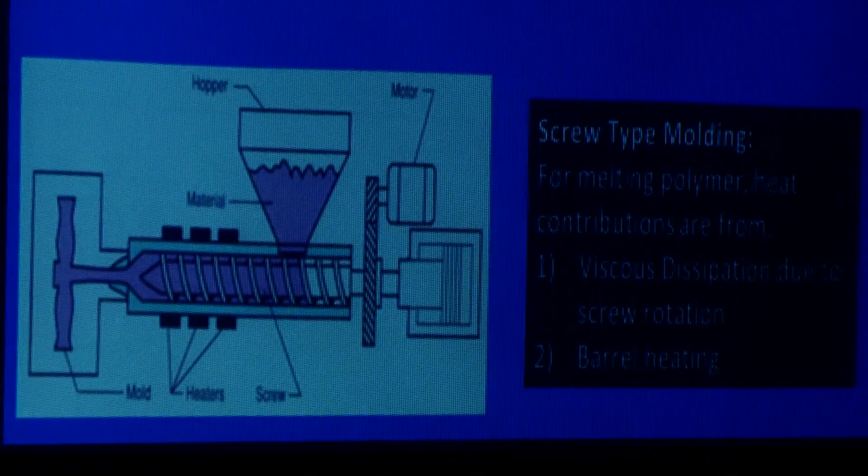Just to summarize our basics of the machines, let us understand what is the function of screws and barrels. In 1872, when the first molding machine was developed, it was a plunger type molding machine. So we used to put polymers inside the barrel, and then heater band used to melt the polymer. And then with a plunger, we were forcing the material into the die.

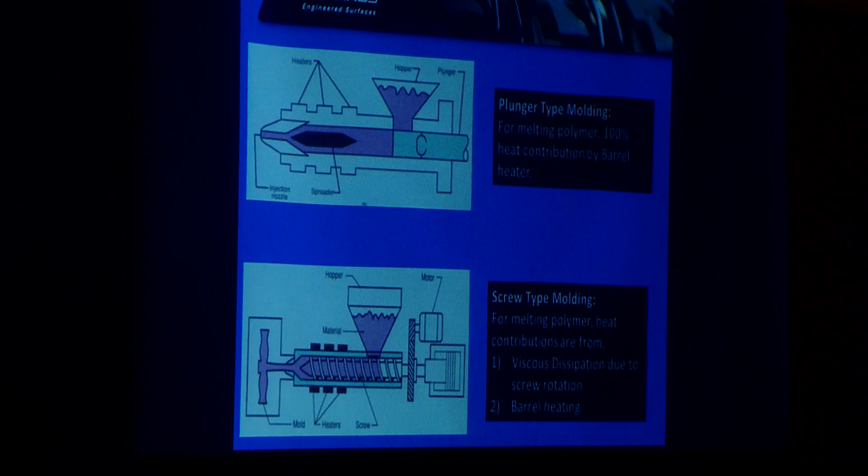With new innovations of screw and barrel type, there is a misconception that the barrel is doing all the heating and the screw is just conveying the material further, which is not the case. In molding machines, whether it's extrusion or injection, what you are using right now, the prime cause by which your material is getting melted is because of the screw rotations, which creates a phenomena called viscosity dissipation. And your barrel heating is just a secondary input.

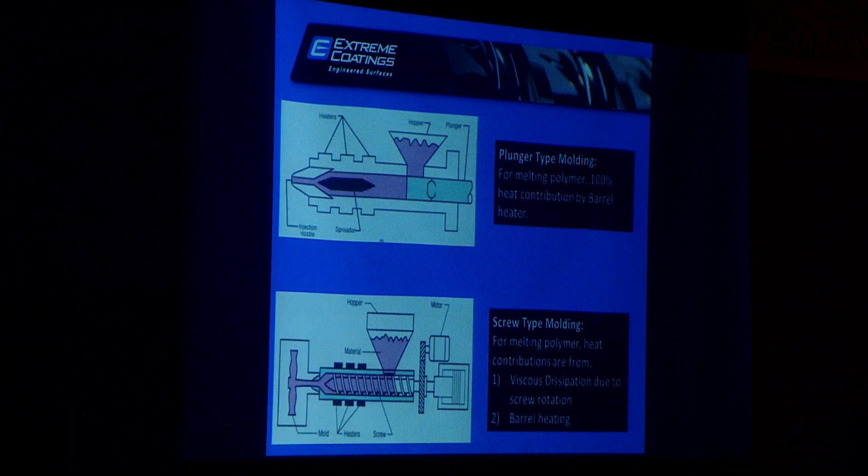What it does basically, when the screw rotates, is stretch these films, and because of this stretching and compressing, it generates heat. The bottom picture can explain you in a much better way.

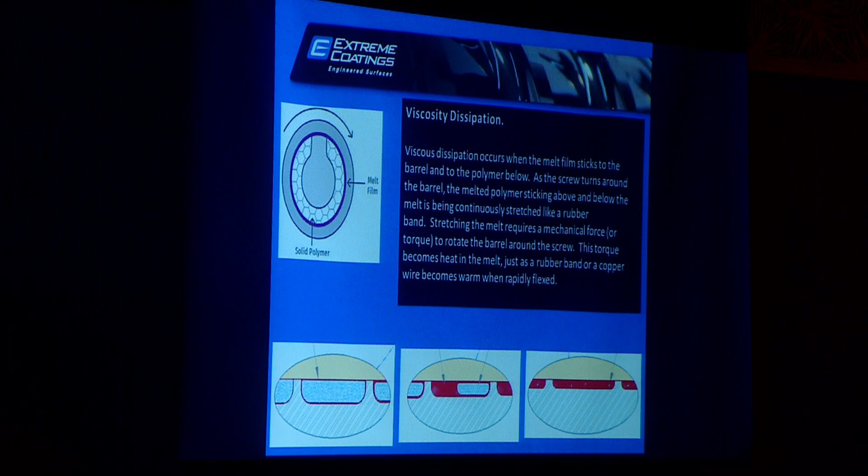So you can see that all it's doing is, from motor to gearbox to the screw, we are converting electrical energy into mechanical energy, and that mechanical energy is basically melting your polymer.

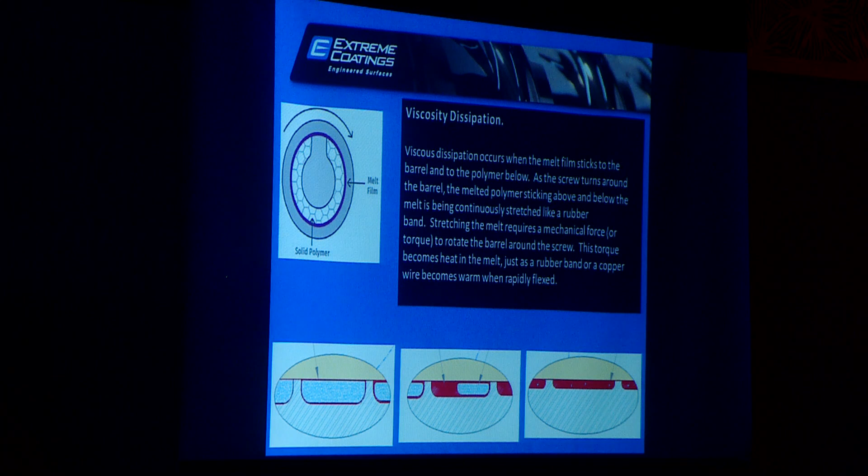Next slide can explain you more properly. This is a cross section of polymer bits in your feed zone. Then you can see how it is melting section by section.

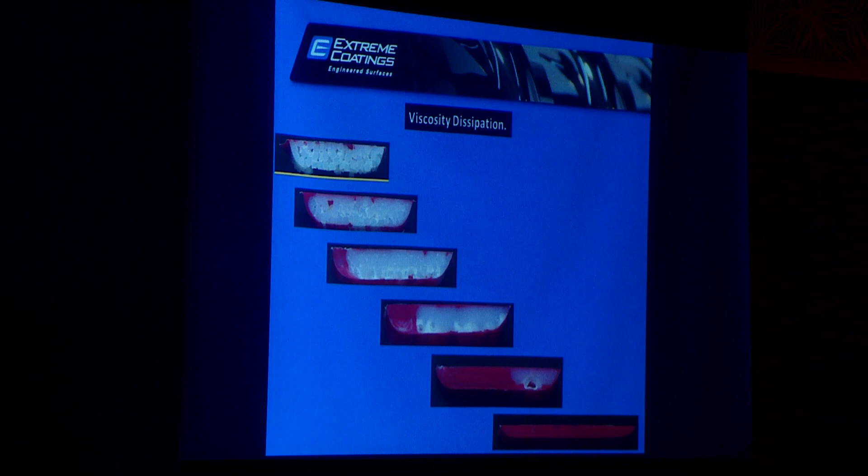So that's what is exactly happening in your screw and barrel, from feed zone to compression zone, and from compression zone to your metering zone. So your screw and barrel is nothing...

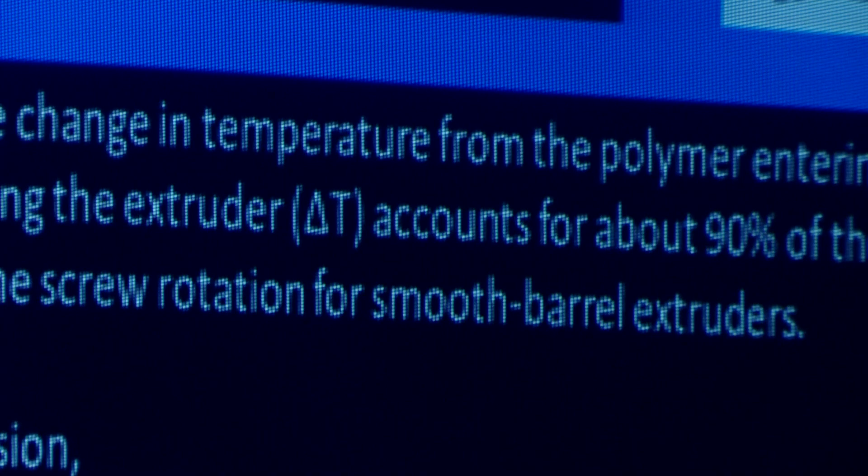Just to mention, these photos we have taken from Dow Chemicals website. Maybe this picture can explain you more properly why the screw requires torque, why the screw requires power, because when you stretch those films, it needs lots of power.

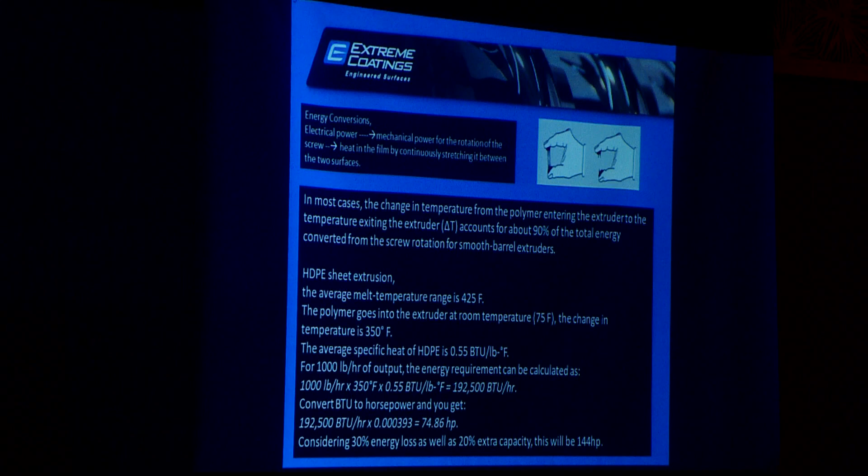So this is how energy conversion happens in your machines, from electrical power to mechanical power, and because of the mechanical power, the screw is rotating and heat is generated. So if you have machines, and if you really understand, this is what is exactly happening in your machine.

Let's take an example. You can see the bottom side. If you know the specific heat of the polymer which you are processing, and also if you know the average melt temperature of that polymer, you yourself can calculate what should be the motor capacity of your machines.

So here I have taken an example of an extrusion line. Let's say we have an HDPE sheet extrusion line, and I wanted an output of 1000 pounds per hour. Suppose that's my desire. Then what is the energy I'm going to require in the system?

So what I will do: I know the average melt temperature, I also know the ambient room temperature at which the polymer is there, and I just know the temperature difference which I have to achieve. Now you know the specific heat of that polymer, which you can Google also. Once you know that, use this formula and you will end up having the converted HP.

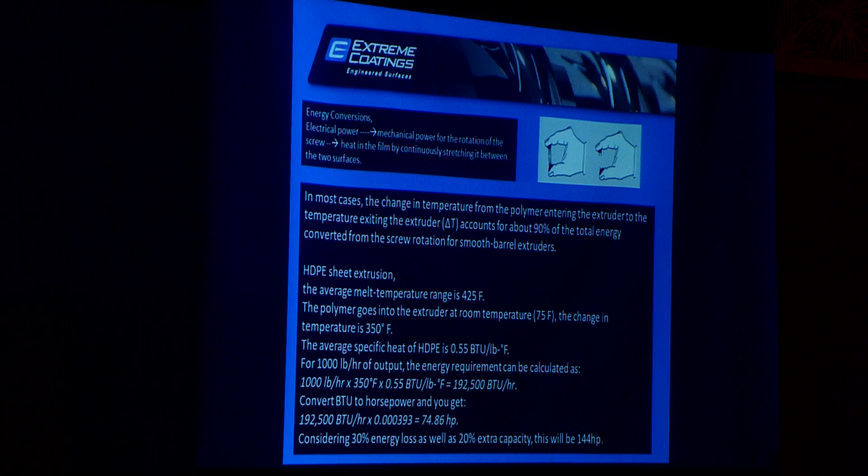In this case it is coming to around 74 HP. We are aware that in energy conversion, some energy loss can happen, so add 30% to account for the losses from conversions. What you get is the power required to melt your polymer. Now, we know that we cannot use 100% of the power capacity, so add 20% more to that, and you will arrive at a number very close to what you have in your machines right now. This is exactly what is happening in your machines.

Now, what is a critical point? Friends, when you buy a machine, there is a clearance given between the screw and barrel. How do you calculate this clearance? If you know the ID of the barrel, let's say 45 mm, just multiply it by 0.001. That is the clearance you get in your screw barrel when the screw and barrel are new.

And what is a critical point? It is the point after which the screw barrel will not function the way it should. That means a lot of unmelted polymer will pass through, or other issues can happen. In extrusion it is directly measurable because there is a loss in output. So what is the critical point?

When you buy a fresh screw and barrel, there is a clearance given, and once that clearance becomes 2.5 times the original, that's what we call the critical point. Beyond this, you are going to make a loss, or you will not have the optimal profit or quality you expected from your machines.

So as a processor, can we avoid this? No, we cannot avoid this. The best we can do is postpone this wear.

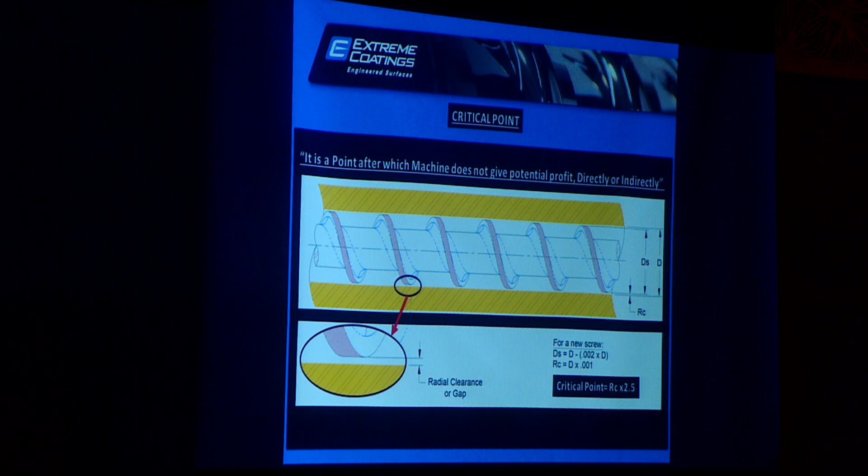I don't want to go much into this, but these are the calculations for how you can calculate the clearance and make a chart of all the machinery in your plant, showing the critical point of each machine. Every 10 or 12 months, when you do cumulative maintenance or something similar, you can check whether the clearance has gone beyond this point. If it has, please address the issue. Do not continue to run your machines, because somewhere you are sacrificing the quality of your products.

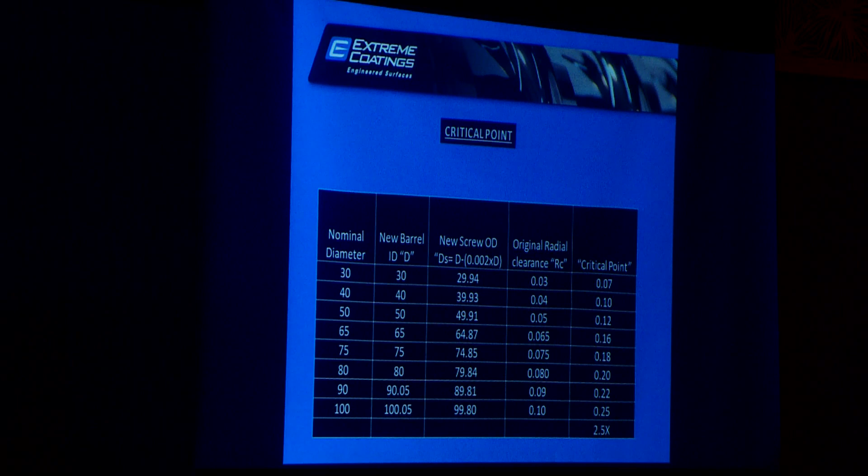What happens after the critical point? If you are an extrusion machine processor, your kg per hour output will definitely reduce, and you will get degraded articles and so on. It is surprising for us when we go to injection molding processes and ask, do you think wear has happened? And the answer is no, we don't think so, because nothing has changed in the cycle time.

But when we actually go to the shop floor and speak with the operator, we realize that the operator did change the refilling time. It's just that it is still not challenging the cooling time, and that's why the cycle time stays the same, yet the wear has happened. Now, does that mean we should continue running the machines?

You should not, because somewhere you are sacrificing the quality, knowingly or unknowingly. We don't always know how to check that quality, but if you have a very stringent process to check the quality of the part, you will find out it is not producing good parts. And it definitely affects the weight variation too.

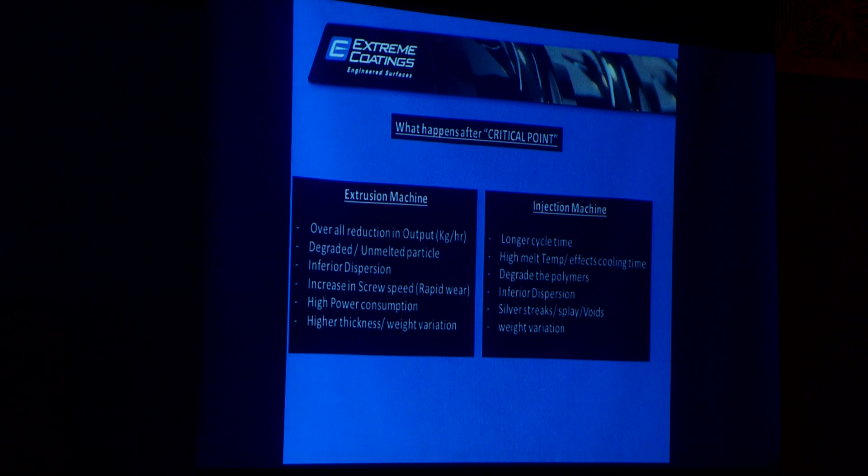Here's an example, a live case study. There was a client in Indore who had twin extrusion machinery. They were into pipe manufacturing and had 9 machines. When they purchased these new machines, the targeted throughput was 340 kg per hour. That's how they started the machines.

So we can say the machines were not used to the best of their capacity. In injection molding, you can't actually see a huge production loss because, as I said, sometimes the cooling time can compensate for production. That doesn't mean it is still giving good quality, though. Somewhere, it is affecting your quality.

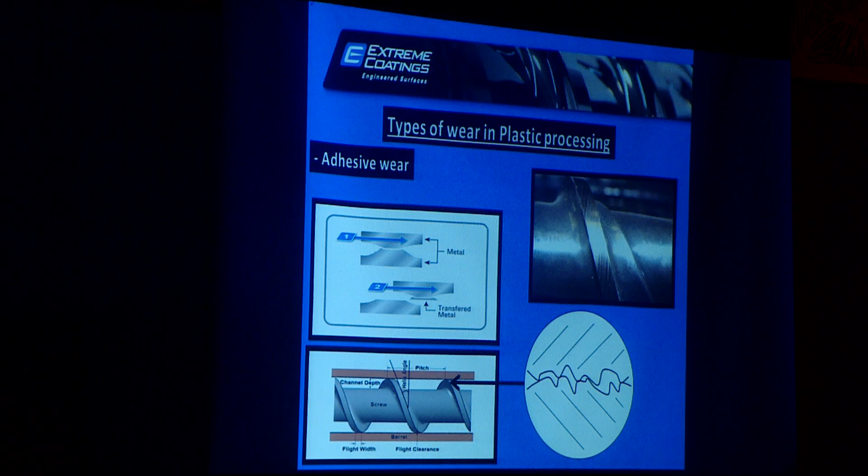So why does wear happen? As I said, there is no way you can completely stop the wear. Wear is going to happen. What are the reasons for it? This itself is a very big subject, and it's very difficult to cover these things in a few minutes. But there are typically four kinds of wear.

The primary reason wear happens is metal to metal wear. Why does metal to metal wear happen? Unfortunately, in extrusion or injection molding machines, the assembly of the screw is a cantilever assembly. So one side is always going to be free. And if you put fillers, or if the diameter of the screw is very high, because of the self weight, somehow, some way, two surfaces are going to come in touch with each other. Which two surfaces? The barrel ID and the screw OD.

Now, with our eyes we cannot see this. We see that the screw and barrel surface are very smooth, but actually it is nothing but peaks and valleys. And two high points, under tremendous shear, come in contact with each other. It creates welds between each other, and because the screw is rotating, it ruptures the steel, whichever is the weak one. That's how the wear starts in your machines.

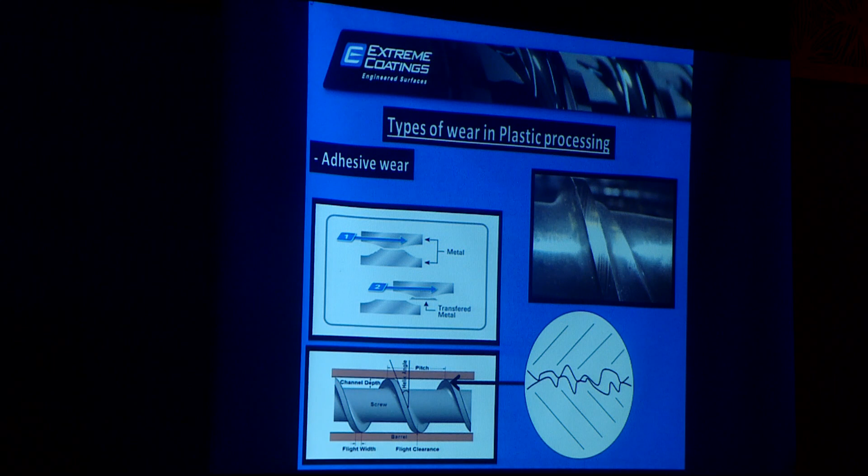So there are many reasons for this. As I said, the alignment, the deflections, and the cantilever kind of assembly, these are the reasons.

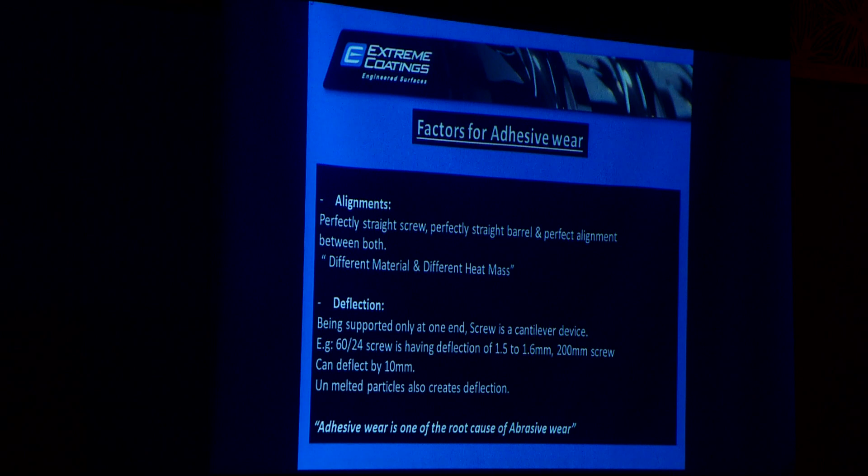Third kind of wear is corrosion wear. If you are processing PVC, CPVC kind of polymer, or let's say PTFE where fluoric acid can attack your surface. Or even in some of the engineering polymers, there is a thing going on, HFFR, halogen free flame retardant, you have to use. That itself is very corrosive in nature, which attacks your base metal and pitting starts happening. And that's how the wear happens. So this is the third kind of wear.

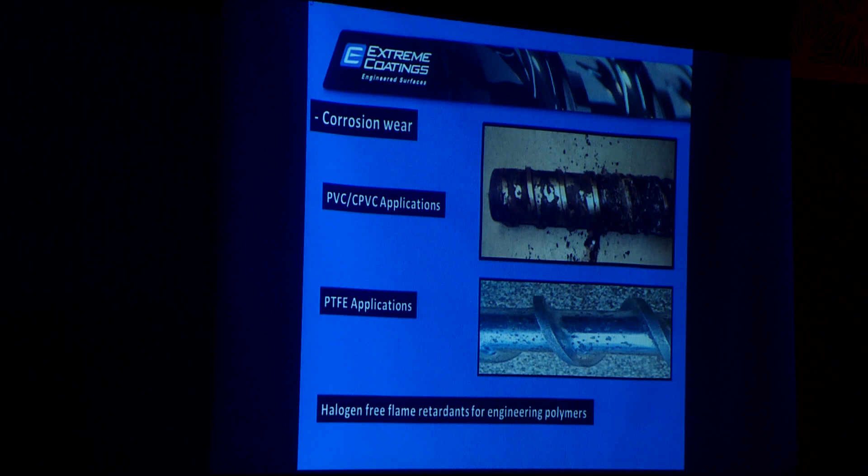Fourth wear is erosion wear. This phenomenon is mainly witnessed by people who are using groove feed extrusion lines. Near the feed pocket, groove feed helps to feed the material a lot. But at the same time, it creates lots of back pressure on the sidewall of the flights. So instead of the screw wearing out from the top, it starts wearing out from the sidewall. And eventually, the feed capacity gets reduced and you start getting lower and lower output.

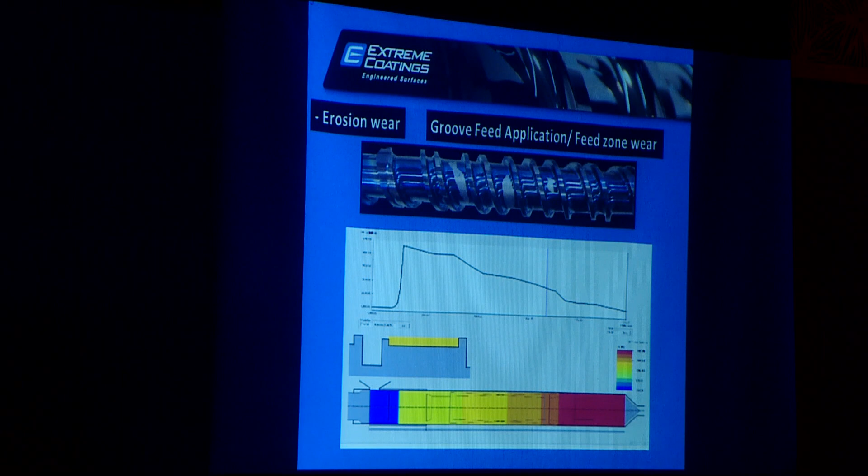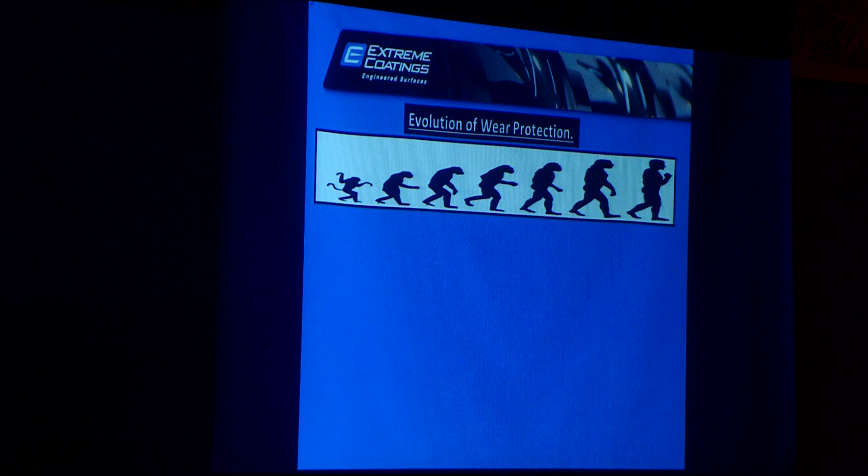So then, actually my topic starts now. What is the evolution of wear protections? Because we have realized there are lots of issues and we need to address that.

First way is, can we play with the steel of the screw and barrel? This is very typical in India. We use EN19, EN24, EN41B, Nitralloy 135. Then in some of the corrosive applications, people use 17-4 PH stainless steel, Hastelloy, nickel alloy.

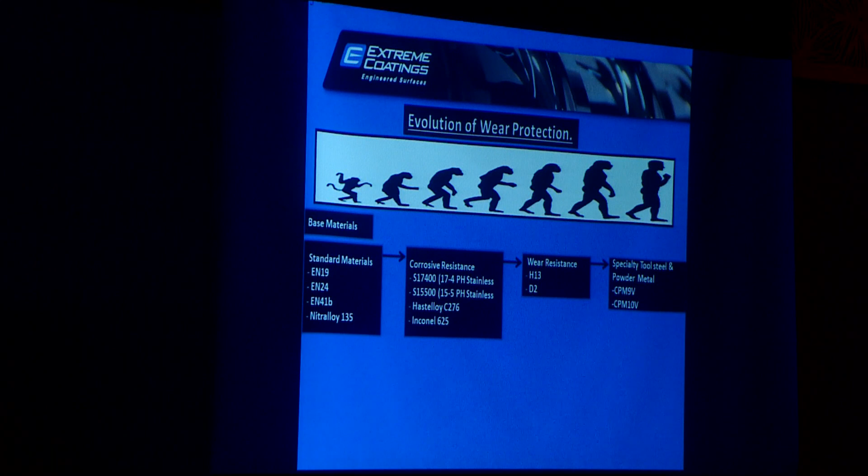Then for some small diameter screws where you require wear resistance as well as toughness, people go for tool steel, which is D2 and H13. Those are the common steels. And then there are special tool steels. People usually import it from Europe, which is CPM 9V, CPM 10V. So these are the steels which you can use to make your screw.

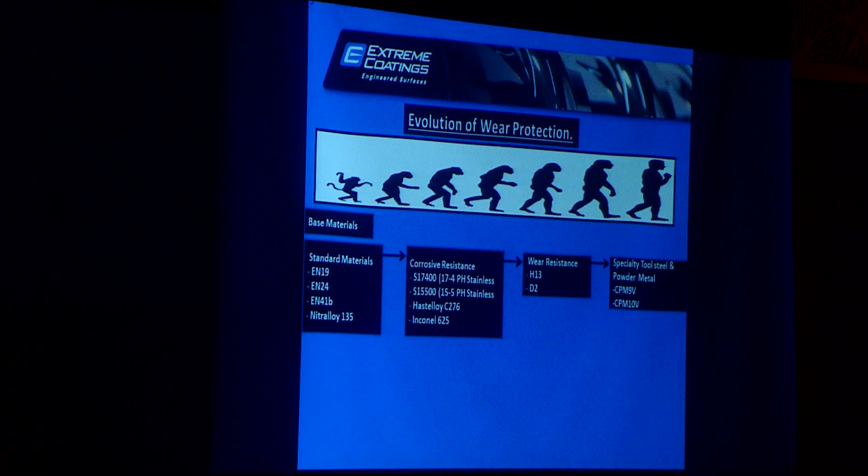This is in our experience. Sometimes a processor comes to us saying one screw supplier is charging X amount, another screw supplier is giving half of the price, and a third screw supplier is charging three times what the first supplier gave. Why so much difference? All this difference in the cost of screw and barrel is coming because of the selection of material. If a supplier is using D2 steel, it's costly, and the manufacturing of that screw is going to be costly too. Some cheaper screw suppliers may give EN8 also, which is nothing but recycled steel. It's the worst quality you can get for your machines. The quotation may look very attractive, but you may end up buying steel which is not suitable for your machines.

So this is the material of construction. What else can we do? We can do treatments on those steels. So surface treatments, the very common one is flame hardening. Then comes nitriding. There are two kinds of nitriding you can do: gas nitriding and ion nitriding.

Then eventually, people started doing plating also. Chrome plating became very famous, then it became triple chrome plating. Then came welding - this is what you are getting in a bimetallic commonly, and we will touch base on that. And nowadays, there are coatings also available. PVD coatings - many of you may have seen yellow screws in exhibitions on China stalls and all those things. So PVD coating is very common, this is also available.

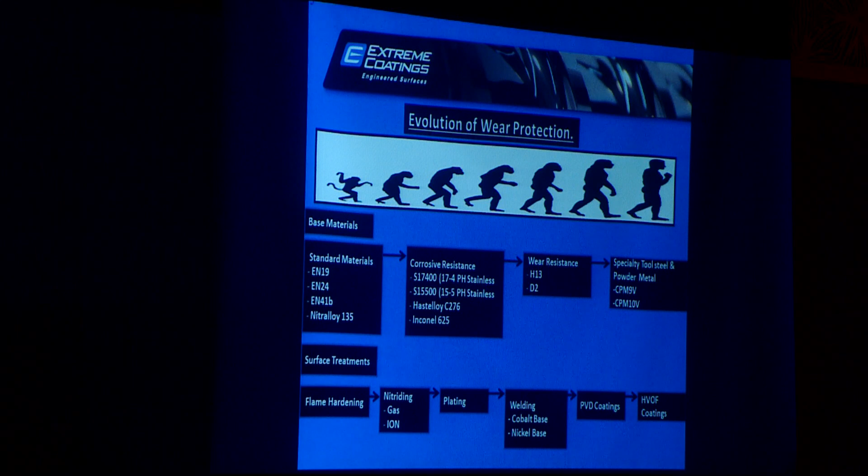And then this is new in terms of when we are addressing you guys, because HVOF coating is also available, from the very beginning in the market. It's been 30 years. And Extreme Coatings - that means my company, we do these coatings, and you will come to know how it is superior to all solutions evolved till date.

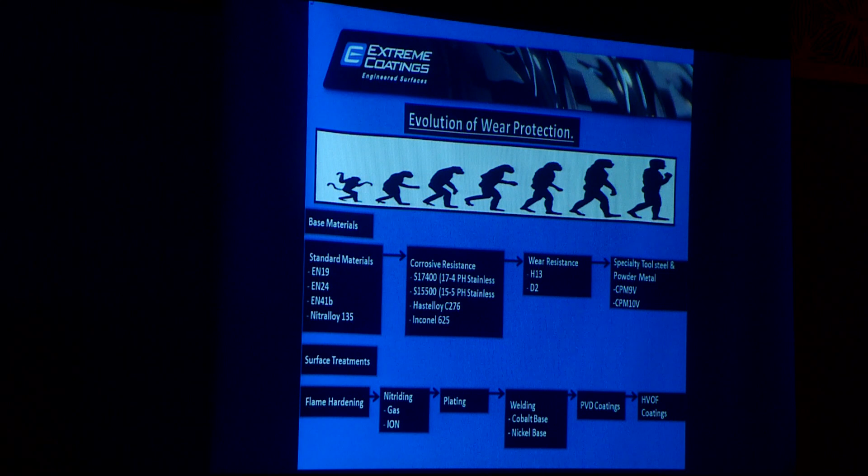So about base steel, I don't want to go in depth about it, but understand steel is nothing but a mixture of different elements. You have iron as the main element, and the rest is what you are adding in the steel. If you see the chemistry, there are some good guys and some bad guys. Like phosphorus is an impurity, it should be less, and sulphur should be less. Carbon can increase your hardness. So the good fellows also have to be used in proportion, because if I increase the percentage of chromium, I may end up having less hot hardness.

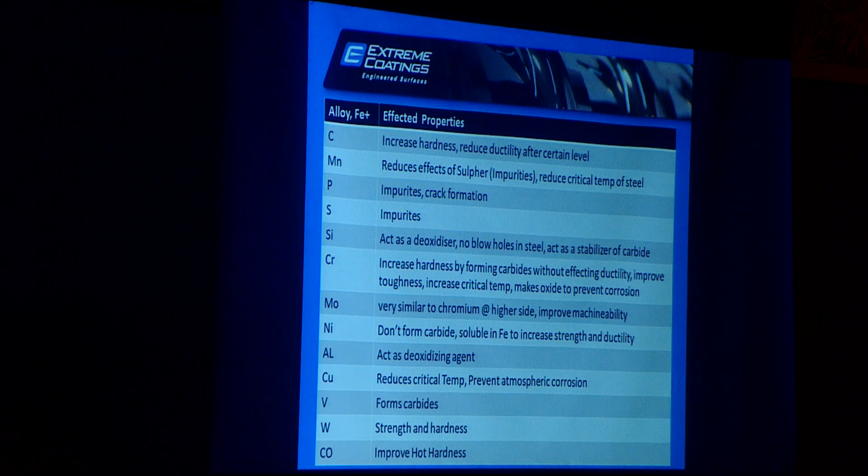So screw suppliers, when they select the steel for the screw and barrels, they have to understand for which applications you are buying screw and barrels. Maybe the requirement is more on the corrosion side rather than the abrasive side. So the typical standard material - these are the four steels which Indian suppliers will give a nitriding treatment on, and they will give you the screw barrels. If you are having corrosive materials, then again this is the chemistry of 17-4 PH and all those things. When I talk about this stainless steel, you can see that the percentage of chromium is more - that means it will give you more corrosion resistance. But at the same time, you have to sacrifice on adhesive wear as well as abrasive wear.

Then wear resistance - D2 itself can have a hardness up to 58 HRC. It's a good steel, but the problem here is that you can't use D2 for a very big size of screw, because this will become a very costly solution. And the same thing is with H13 also. So these two steels are very commonly used for engineering polymers for the smaller diameters.

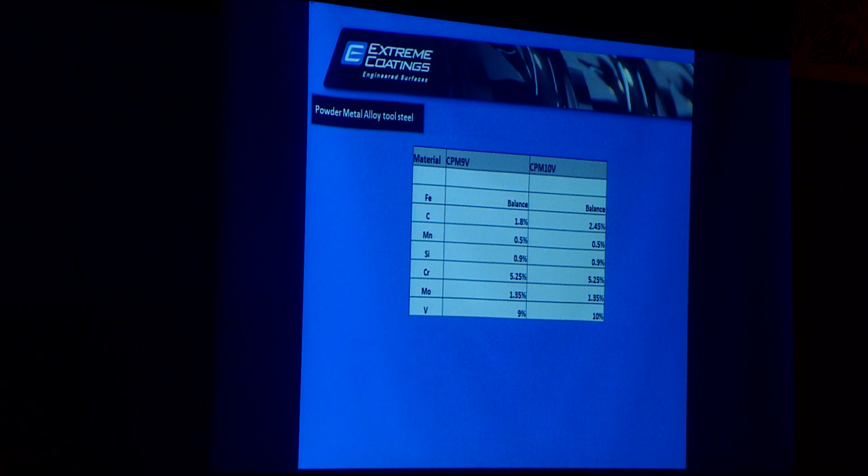And then there are these European solutions, crucible powder metallurgy. What they do is add extra elements - you can see at the bottom, molybdenum and vanadium. These are the elements you can add in the screw. So what I'm trying to say here is that when you purchase steel, you have a very limited scope for adding elements which can improve the property of the steel. And that's why the extra treatment needs to be done.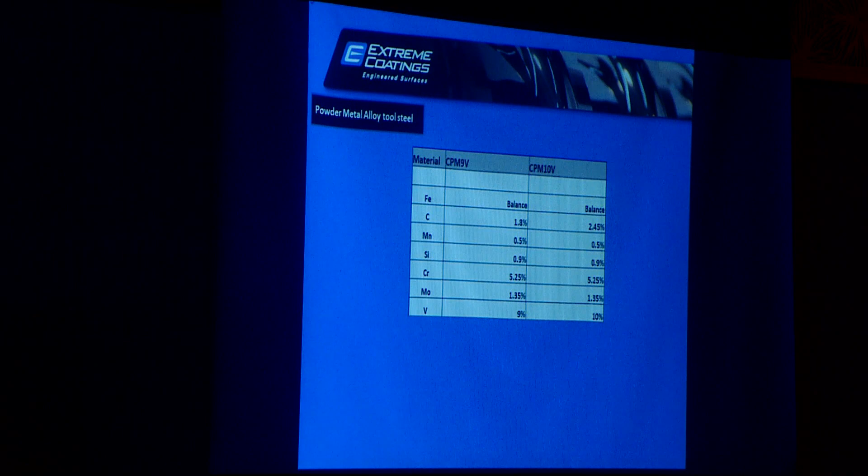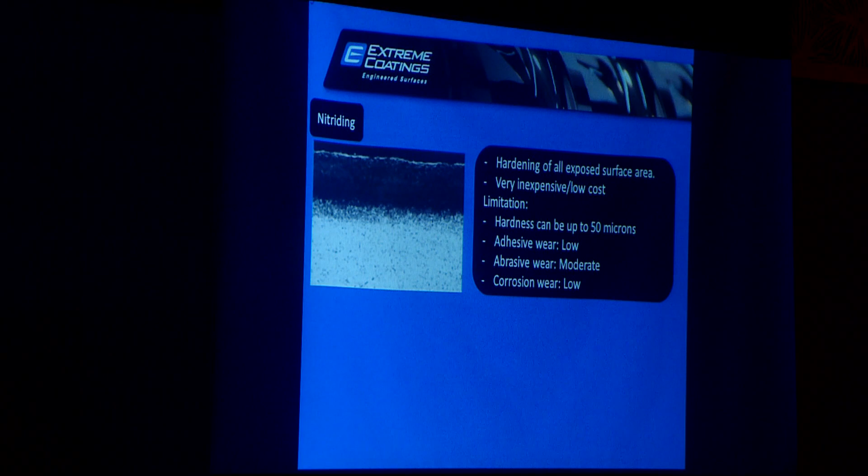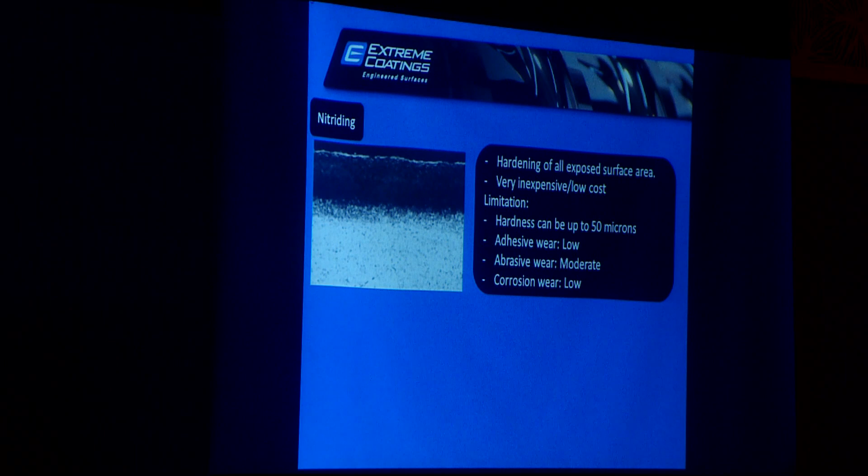What are the extra treatments we can do? Flame hardening - this is very common, I will not go into this. Nitriding is also very common. You have a steel, you put it in the nitriding tank for a certain period of time, and nitrogen penetrates inside the steel surface. So what it does is create a 40 or 50 micron hard layer. The problem with this technology is that for the first 2 to 3 months, the screw will work properly. Once the hard layer is worn out, suddenly the soft screw is exposed, and there is a sudden reduction in your output.

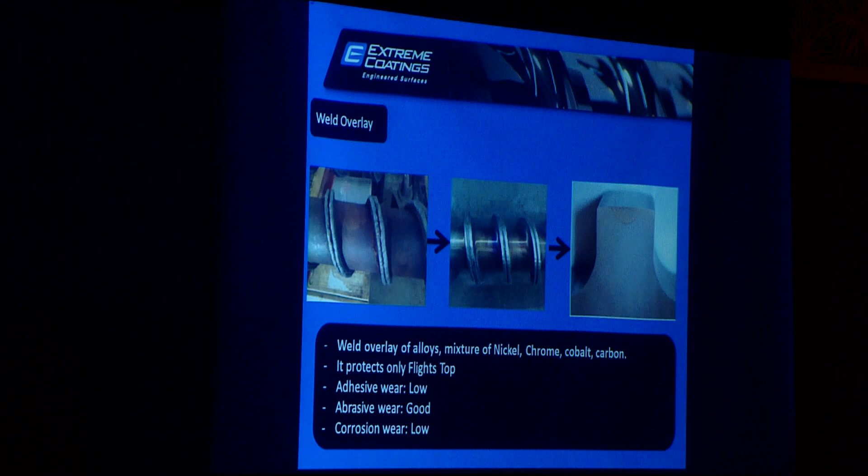The third type is weld overlay. What people do is take a screw, make a groove on the flight, and then use welding materials to fill that particular groove. There are various grades available for this, and this is nothing but the bimetallic which you are purchasing globally. And that's why there is some confusion - sometimes people ask me, the bimetallics from China are cheaper, from Europe it is costly, and this and that. The idea is people are not aware of what they are buying.

So there are basically four kinds of welding material people use - Colmonoy 56, Colmonoy 83, Stellite 6, and Stellite 12. You can see the chemistry of it on the right hand side. The very best available was Colmonoy 83. Why? Because it was having up to 25% of tungsten carbides. It can go up to 30-32% also, depending on the suppliers.

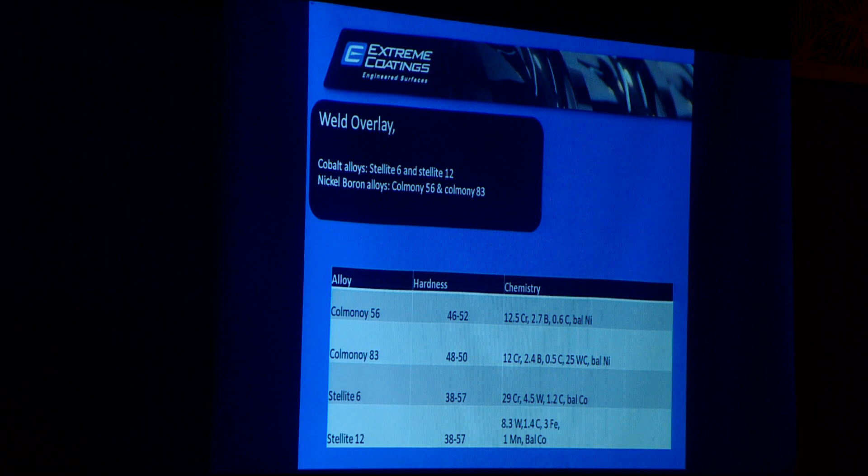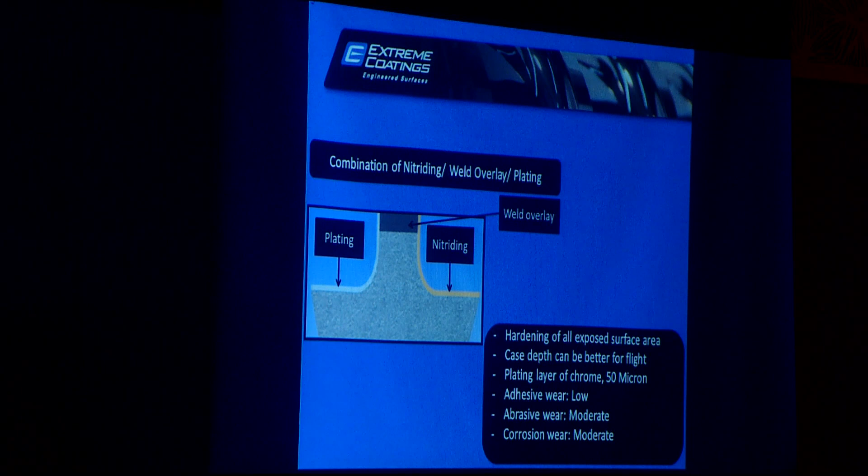Some people use a combination of different methods, like plated screw with nitriding surface, or welding screw with plating, depending on the supplier.

Then there is something called TiN coating also. The limitation of this process is it can be done only on a small diameter of screw, and the coating layer is only 4 to 5 microns. Once this 4 to 5 microns wears out, your screw is exposed and it will start affecting your processing.

So this is what we do as Extreme Coatings. We have a technology by which we put tungsten carbide on the entire screw surface area, that means OD as well as on the root diameter also.

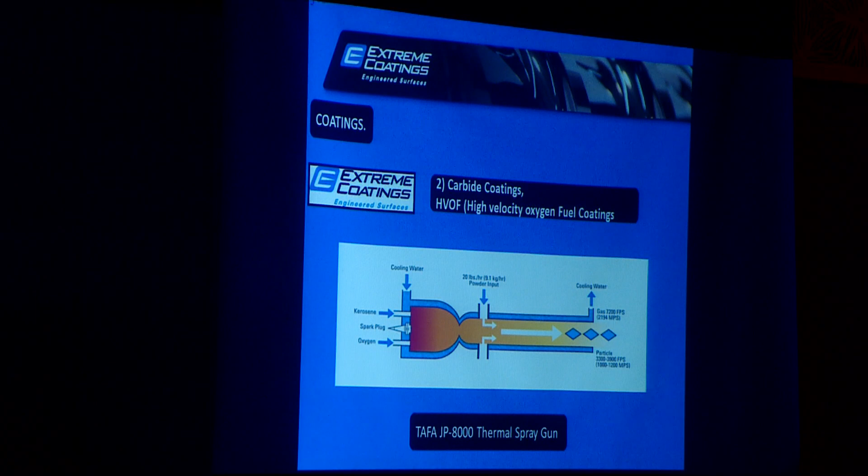What are the benefits of it? Two things. First, unlike other bimetallics which can protect only the flight top, we can protect the entire screw. That means all the issues, all four kinds of wear which industries have - adhesive, abrasive, corrosive, erosion - all can be addressed with one solution.

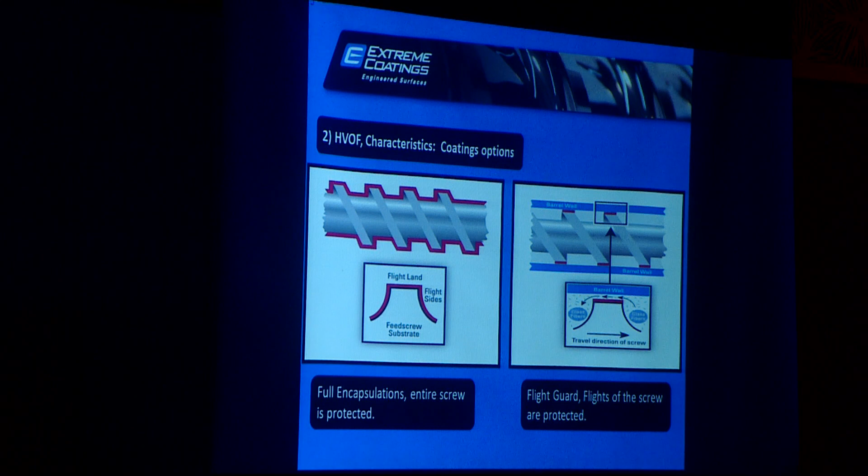We can put a layer of tungsten carbide of 250 micron or 125 micron depending on the requirement on the screw surface area. As I said, 125 to 250 micron layer is possible.

What is the benefit with our coating? As I said, the very best bimetallic available globally can put only 25 to 32% tungsten carbide, while with our coating we are putting 88% tungsten carbide on the screw, which itself can give 2 times to 3 times the life of the bimetallic you are using.

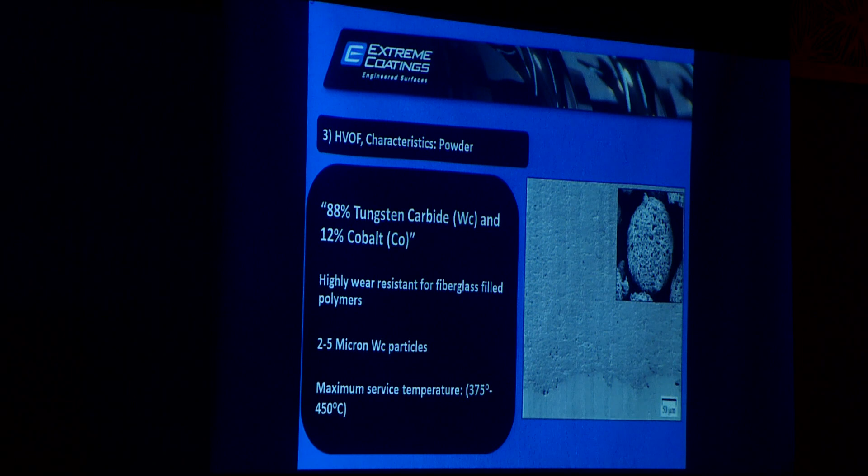Forget about the nitrided screw - compared to that, it can be 5 times. But compared to globally best bimetallic screws available, this can give at least 2 to 3 times.

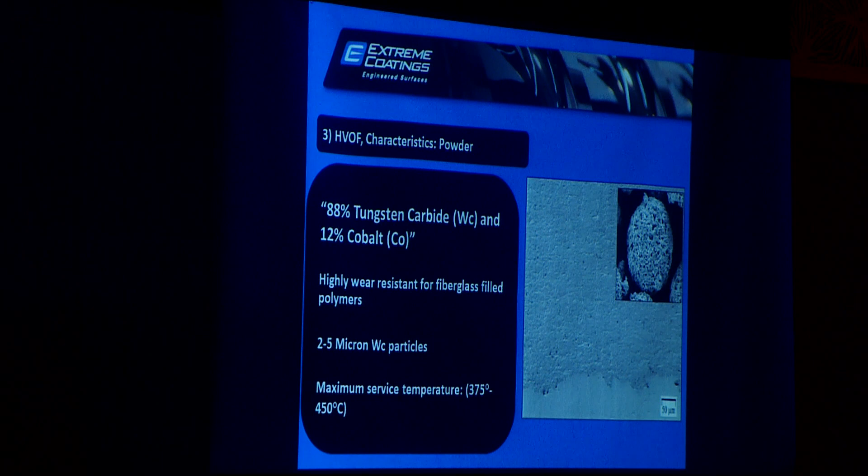Some of the tests available in the market you can Google also. The first test is for corrosion resistance. The test name is ASTM B117, where you have a piece tungsten coated with HVOF, the process which we did, and on the other hand a piece with hard chrome plating, and we submerged both into a particular solution.

When you compare it, the macro hardness of our coating is almost similar to other solutions, but our bond strength is very high. The porosity is less than 1%, but hard chrome plating always has fine cracks.

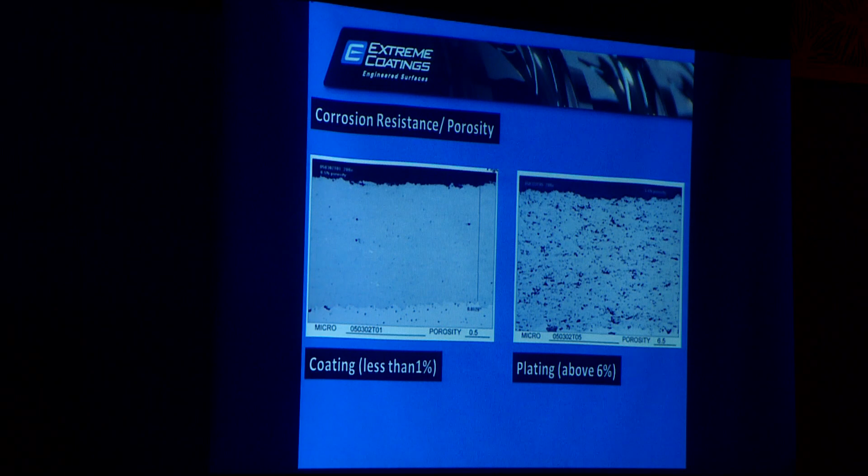Let me explain what I'm trying to say here. On the left hand side is a coating surface which does not have high porosity, while on the right hand side is a chrome plating surface with lots of porosity. That means acid can enter up to the base metal and start pitting, while that will not happen in our coating. You can literally see there is hardly any porosity or crack on the surface of the coating.

This piece coated in solution compared to chrome plating - the chrome plated piece started pitting after 55 hours, while the coated piece lasted for 720 hours. That's the beauty of corrosion resistance with carbide coating.

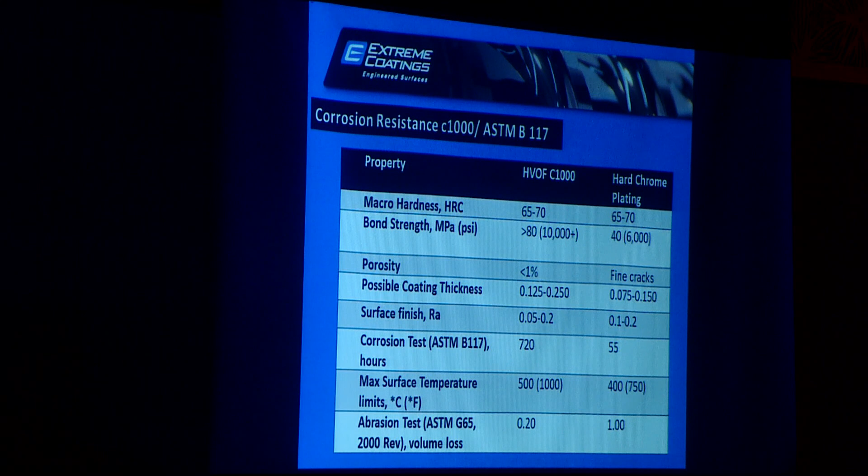We can discuss more, but there's a limitation with time. The same test is available with abrasive wear also.

This test has a rotating wheel and a metal piece fitted on an instrument, and you check what volume is lost. Sand is poured from the top, and after a certain number of revolutions, they check each piece for how much volume of that particular steel is lost.

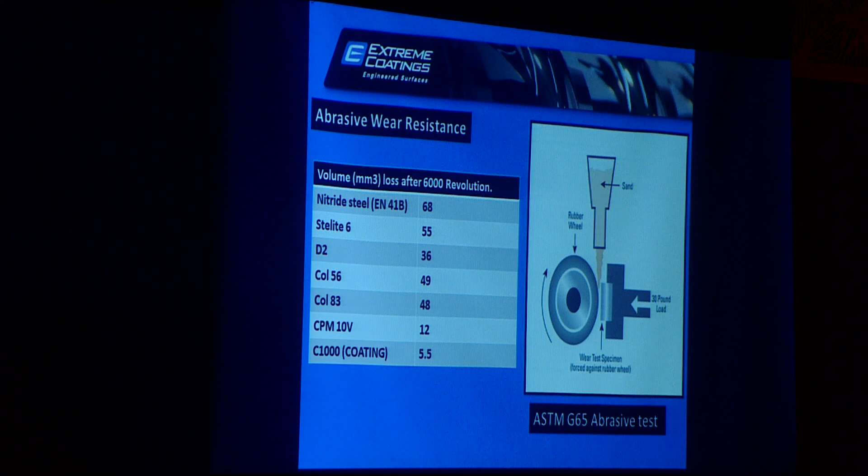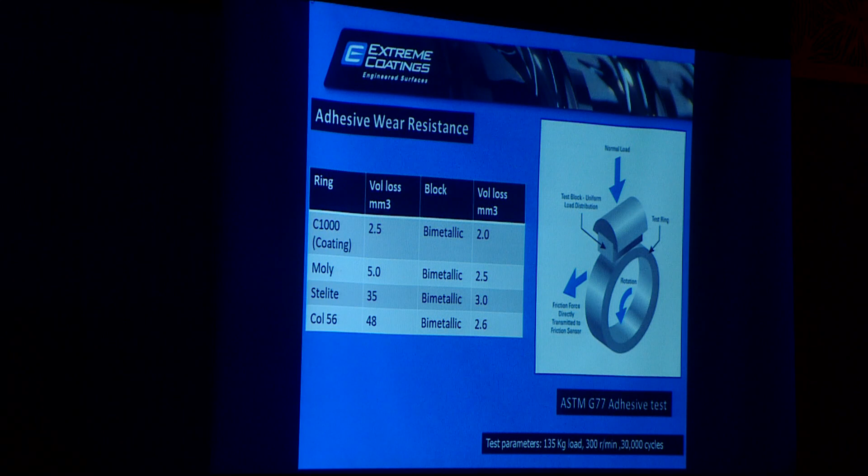Same thing with adhesion also. A question may come: if we're improving a lot of properties of the steel, is it not going to affect the barrel? No, it does not. That's the beauty of the solution.

The reason is tungsten carbide, molybdenum, vanadium - these are elements with very high melting points. So when two surfaces come in contact with each other, because of higher shear, in the nitrided case it used to create a weld which would rupture the surface. But in this case, the welding is not going to happen.

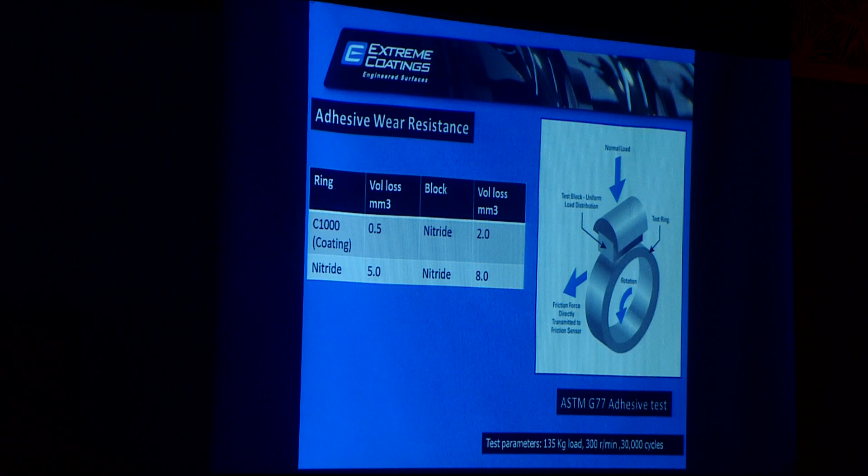The screw is going to slip on the barrel surface, and because of that, this coated screw even complements the nitrided barrel life also. That's the beauty of the solution. These are all comparisons with different steels and what the results were.

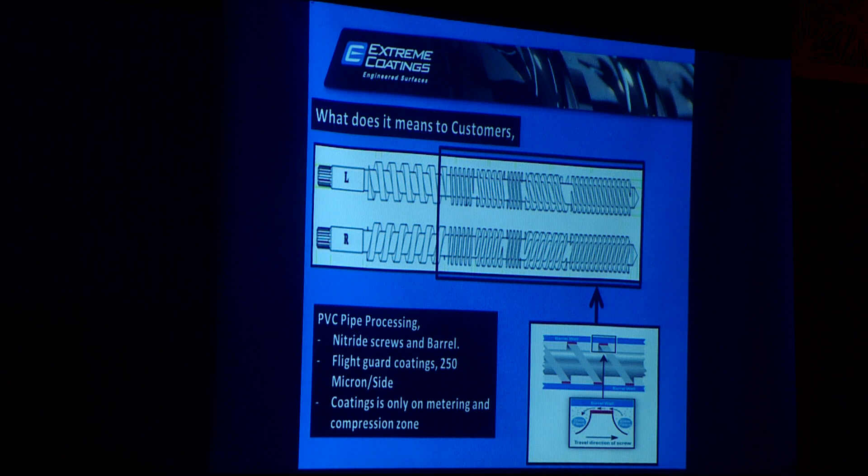So what does this mean to customers? Right now, if you are having twin screws, we are coating OD of these screws. If you are processing CPVC with twin screws, we can fully encapsulate the screws.

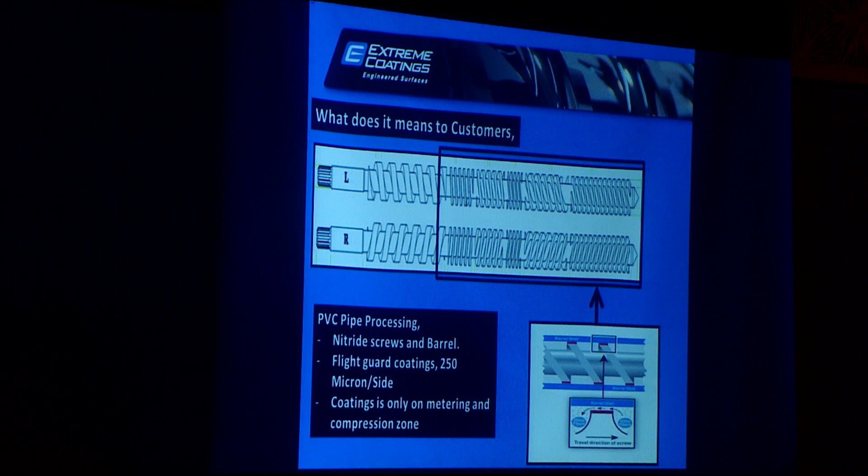These are some live case studies and the results we got from our customers. Previously with nitrided screws, they were having 7,000 hours of life. Right now, the screw is running even after 15,000 hours of life. In one case where the customer had a very high percentage of calcium carbonate, the screw lasted only 4 months. With coating, it is lasting for 14 months.

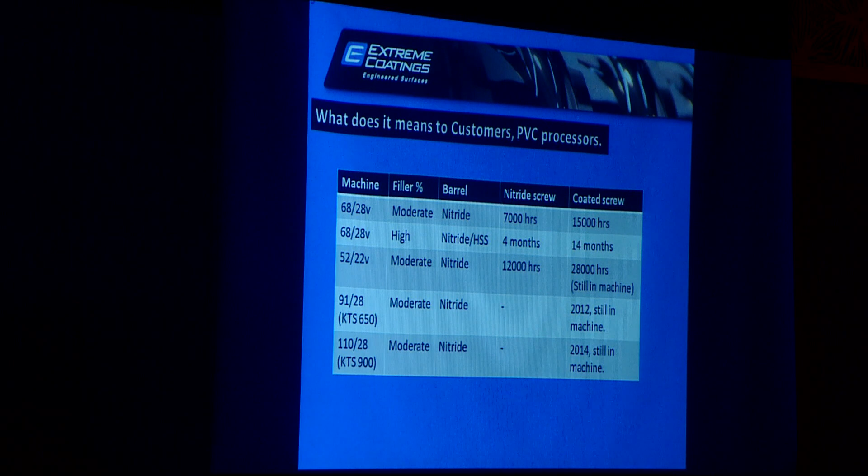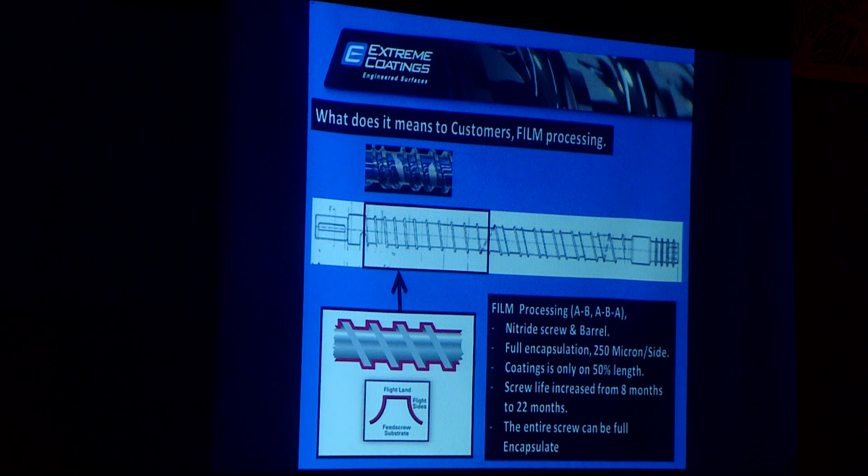Same thing is with the film processor also. If you are using a grooved feed system, another advantage with the coating is that you can apply it only on the required area. It's not necessary to protect the entire screw. In this film extrusion line, LDPE, LLDPE or HDPE does not wear a lot. It's just the grooved feed which creates pressure and wears out your screw. So we can put coating only on that pocket area, just 4-5 flights, and the screw will have a wonderful life.

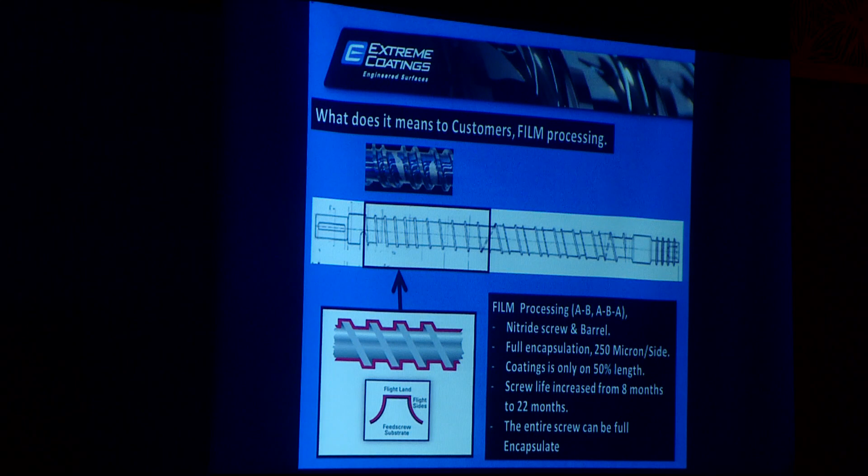Some case studies of injection also, glass-filled nylon with HFFR. A customer using D2 plating got 300,000 shots with CPM 10V. With that, they got 10 lakh shots, and with our coated screw it already crossed 40 lakh, I think. Yeah, that's it.

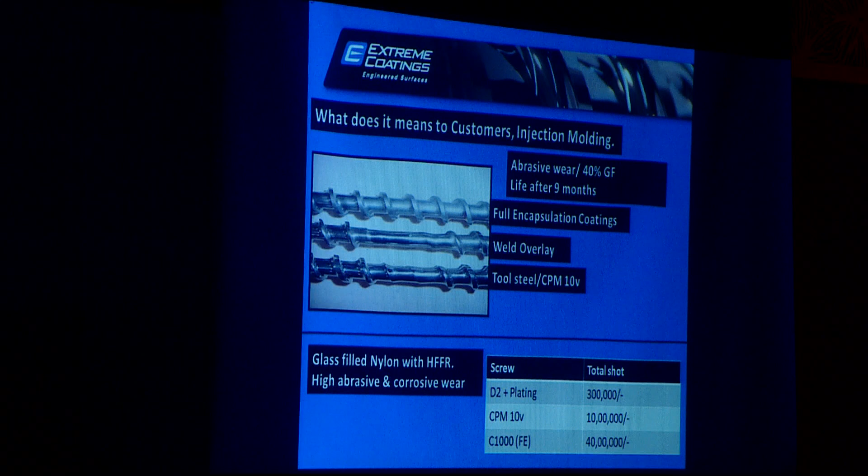So you can check our website, case by case, material by material. We have lots of case studies. You can see how coating has improved the life of screws and barrels.

About our company, we are a USA based company. We have plants in Florida as well as Houston, and from there we cater to the Europe market and America market. In India, we have a plant at Taloja, which is very near Mumbai. We have a head office in Chennai, as well as a sales office in Mumbai. This is a second generation USA based company. Till date, we have coated more than 50,000 screws to various customers across the globe.

Some of the list of our customers, from where you can buy this coating, by the way, you can approach your OEM. If you are injection molding processors, you can approach Milacron, Toshiba, Windsor. These are all our clients. They are aware of what we are giving. You can just tell them that you want to opt for this coating, and they will happily give it to you.

Same thing is with extrusion lines also. If you are having Rollepaal machines or Rajoo machines or Shubham machines or whomsoever you are having, you can just talk to them and they will happily give you these coatings. I'm not able to cover all the end processes because it's such a big list, but just to give some idea, we have clients from the PVC segment, engineering polymer segments, metal injection molding segments. We have catered to all kinds of customers, including rubber molding customers like Desma and Klockner.

For more information, you can contact me or Mr. Deven, who is residing in the Chennai area, and we can discuss more in detail. I'll just play a small video.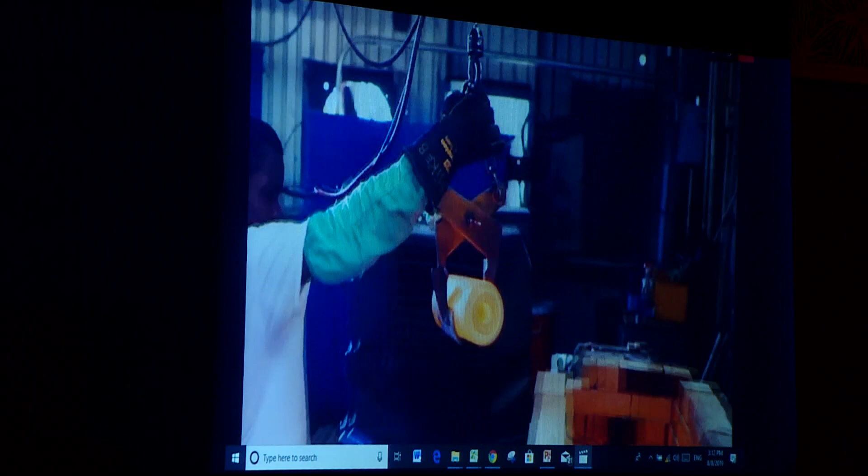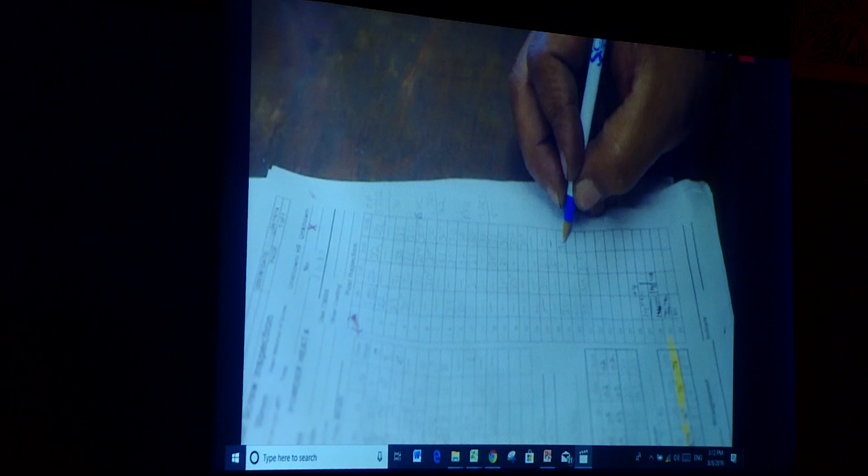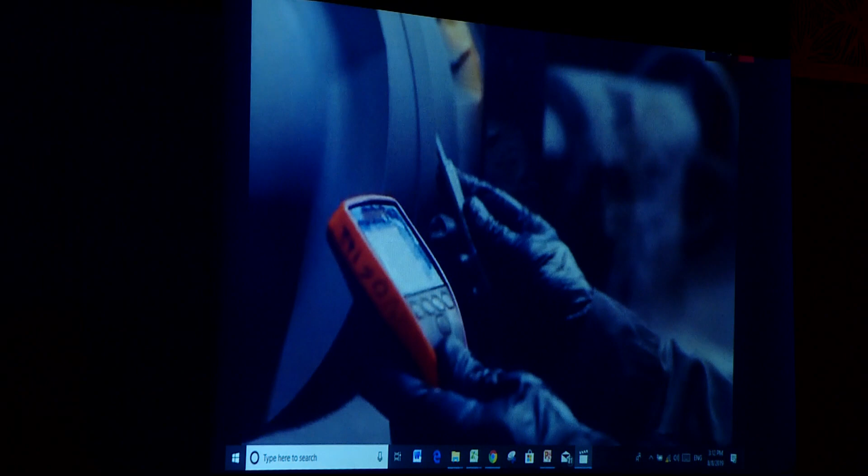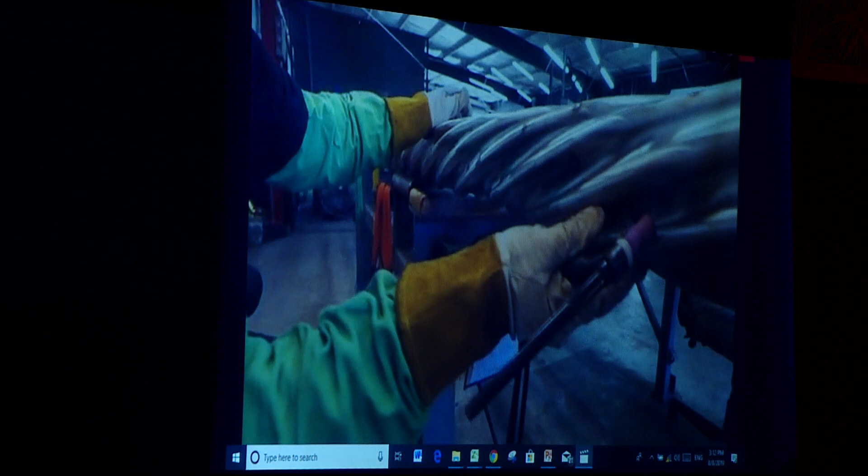When we have a customer that has a problem, or an industry that's suffering from a problem, we go directly to the folks that are running the machinery and we ask them what exactly are the problems that you're having. If you ask anybody globally about surface treatments of feed screws, they would say, oh yeah, we use these people in California, Extreme Coatings. Extreme Coatings specializes in applying high-velocity oxygen fuel coatings, otherwise known as HVOF, to surfaces to resist extreme applications of wear. Automotive parts with glass fiber, metal injection molding, PVC corrosion resistance - all the ways that processing resins in an injection machine or an extruder can lead to rapid wear or corrosion of the components. They make more money by not losing money to premature wear conditions.

I'm Scott Kaplan, I'm the Executive Vice President. My name is Greg Quinn, and I am Vice President of Sales for the plastics and rubber industry. My name is Tom Kivinge, I'm in technical sales with Extreme Coatings, and I manage our facility in Bombay, India. And my name is Curtis Cato, I'm the president and founder of Extreme Coatings.

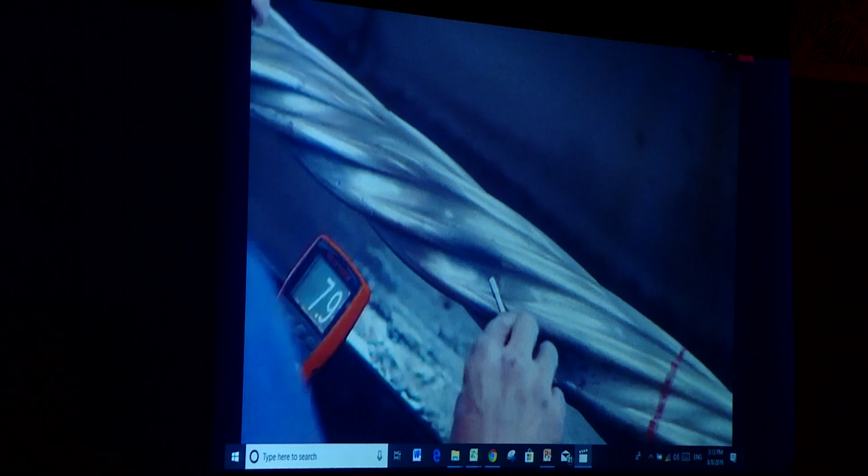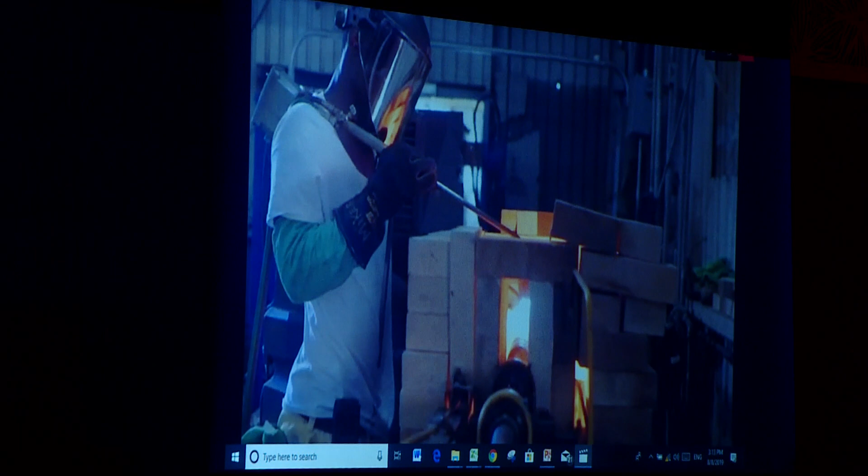The future for us is making this available throughout the world through global expansion - places like Dubai, Europe, China, South America. We create supreme value, so cost should not be an issue at all because the payback is so significant. People are willing to make this investment to have longer lived equipment. Feel free to contact us about any specific wear or corrosion issue that you're having. We're looking forward to working with you to help solve any of your wear-resistant problems.